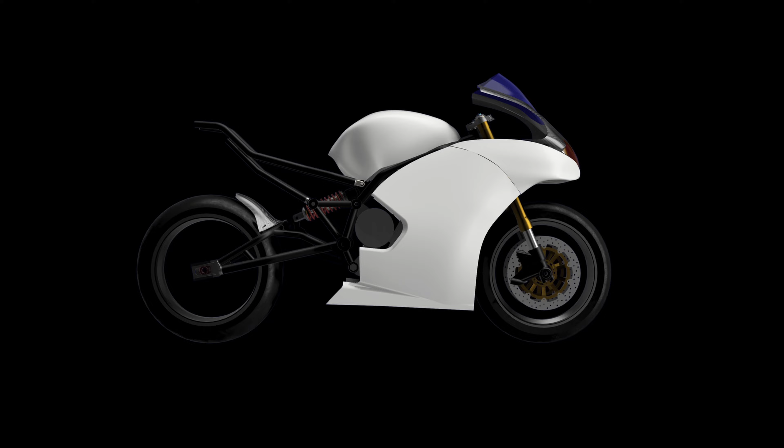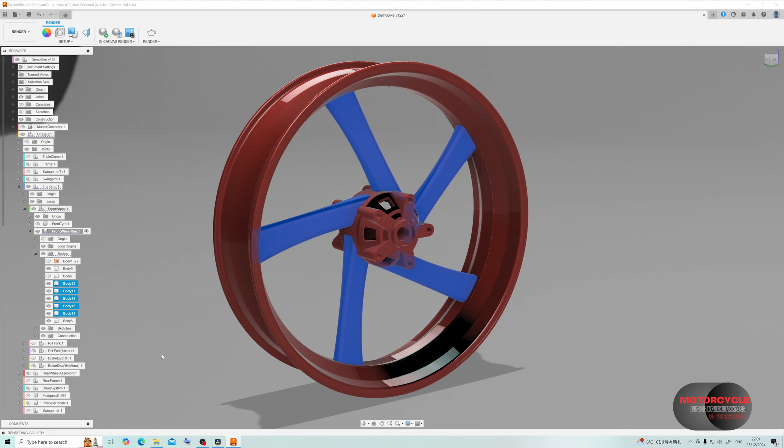In this video we're going to model a front wheel, and we're going to simplify it by breaking it into a number of components, starting with the rim, and then we have the hub, and then from there we will build the spokes. Now, the manufacturing method would usually dictate how we want to build a model. In this case I'm going to treat it as if it's a high pressure die cast wheel.

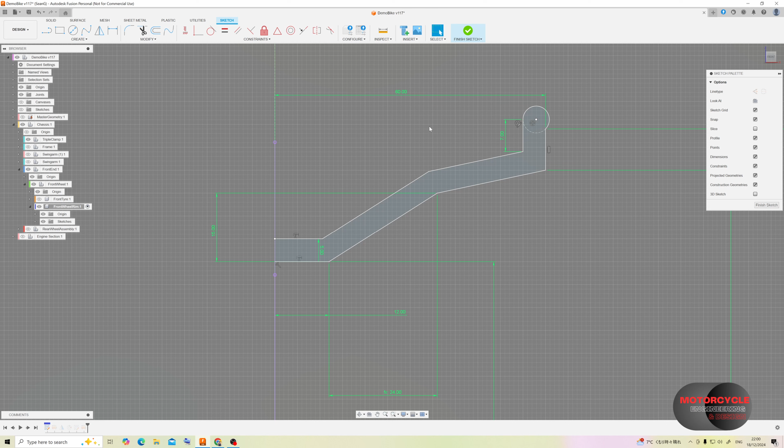So to start we're going to need to sketch the profile for the rim. We only need to sketch half because we can mirror it later on. Now, depending on the style of bike and the type of wheel, this profile could be quite different. In this example we'll just be using the kind of wheel from a 600cc sports bike. So once we have this open sketch profile, we can then revolve it as a surface around the spindle axis.

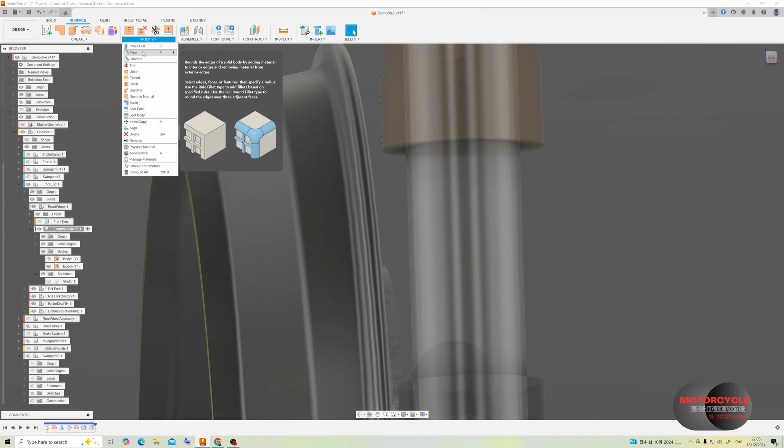So as you can see, we now have a hollow half rim. Now before we mirror this to complete the rim, this would be an ideal time to start applying our rounds so that we can reduce the amount of work we need to do later on. Now in mouldings and castings it's typically ideal to maintain a consistent material thickness where possible, so I try to keep my internal and external rounds concentric.

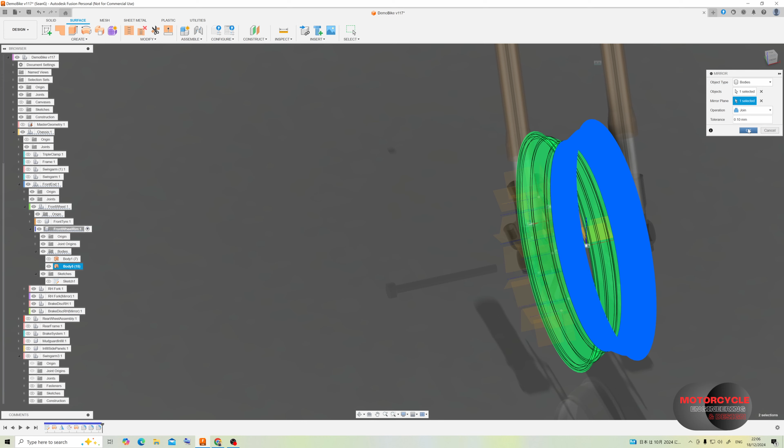In high pressure die casting however, we could probably get away with a little bit of extra material thickness here and there, within reason, due to the high pressure nature of this process. One of the main problems is the difference in temperature throughout the material. We know as materials get hot they expand, and as they get colder they contract. So if they're heating or cooling at different rates, we can get warpage and even pockets within the material. This can then lead to cracks. That would be porosity. Other problems would be shrinkage and warping, to name a few.

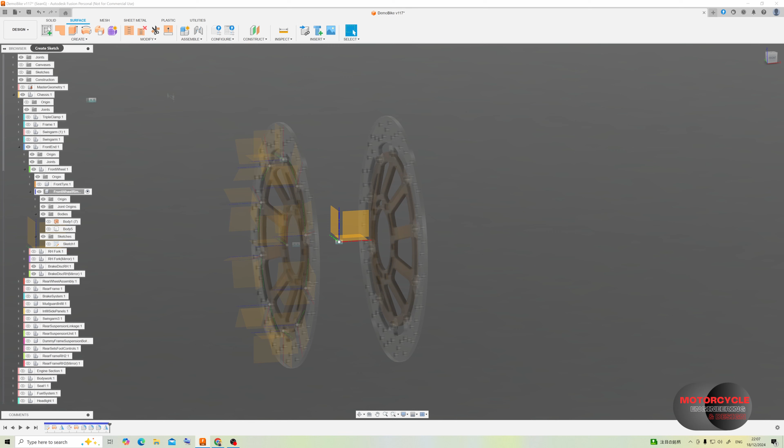Now in the previous video I modeled up some brake discs in position, so I'm going to use that position as a reference when I create the mounting points on the hub. Now, as with the rim, we just need a profile that we're going to revolve around the spindle axis. And we only need to draw half of it and then we can mirror the other half across.

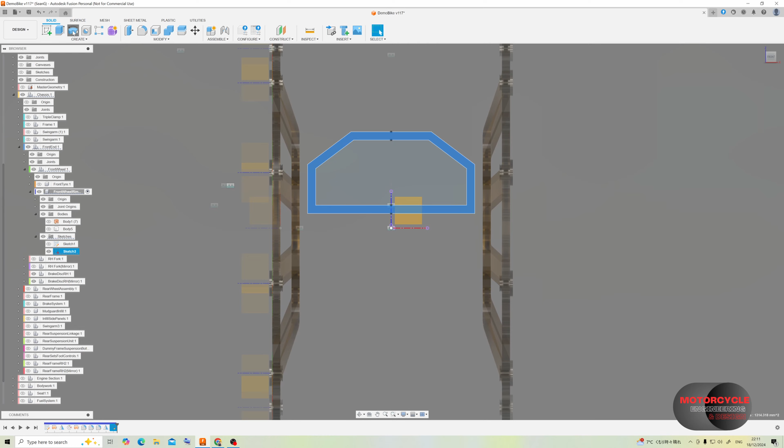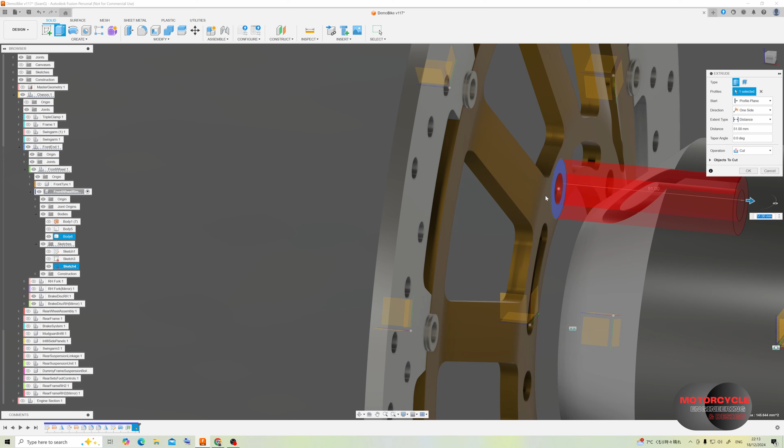Now we're going to start considering the mounting bosses for the brake discs. So I'm creating a plane offset from the mid-plane, roughly at the point where I want the brake disc to be mounted. I'm then going to extrude the bosses to the mid-plane. You could of course do this in the opposite direction, extruding from the mid-plane out to the offset plane. Of course I'm going to have 5 mounting points, so I need to use a circular pattern to copy this around the hub. We can then mirror them to the other side.

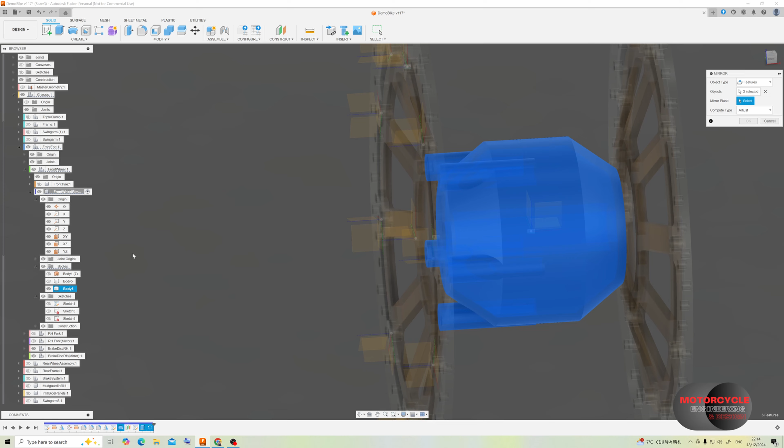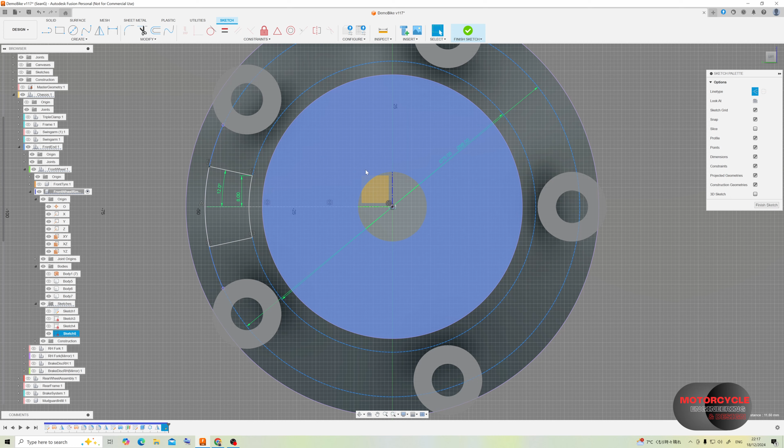So like most hubs, this is actually hollow, so I'm just going to cut some windows so we can see through it. I'm going to do this with 2 different sketches. The first one I'm going to lay out the profile that I want to be projected onto the surface. Then we need to come out of that sketch, creating a new sketch. And that's where we create a projection onto the surface. We have to select the vector direction, which will be the axis.

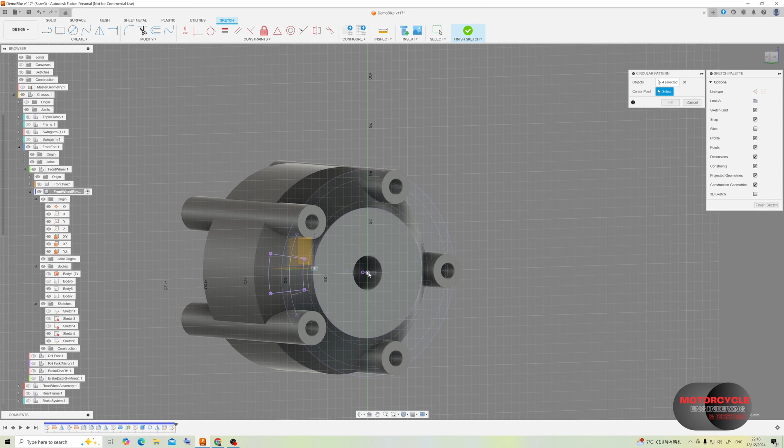So here I'm using the circular pattern to copy the sketch profile around the hub. Now this method is actually a little bit inefficient. It means repeating the same actions 4 times. Ideally we would break it down into sections, so we'd only model like a fifth of the hub, and then we could circular pattern that to complete one side and then mirror it for the complete hub.

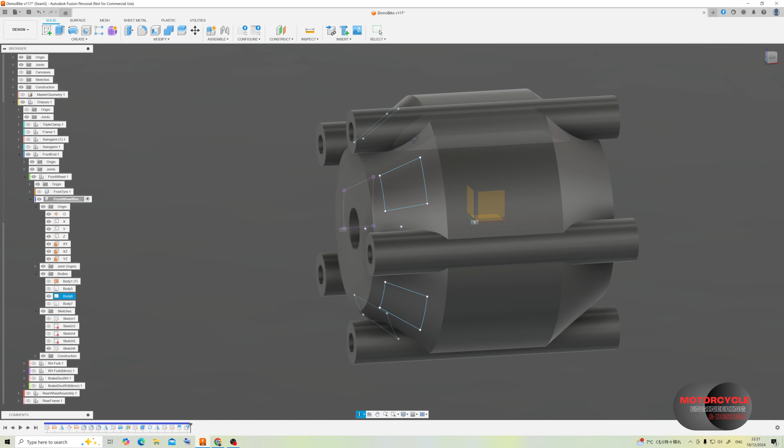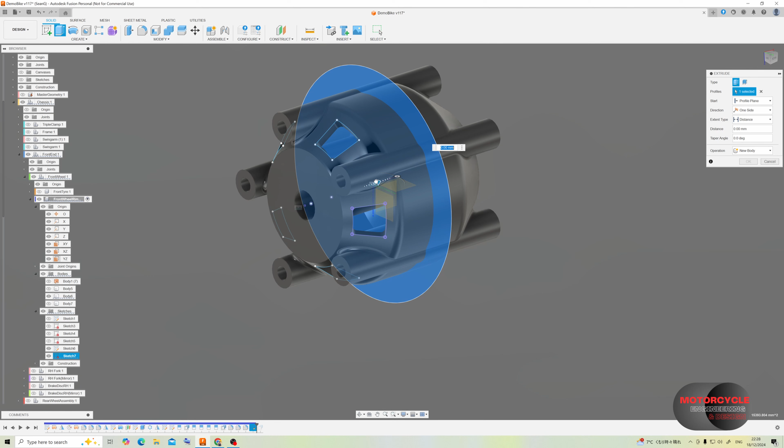So what I've done here is I've used the sketch profile to split the surface. I've then used push and pull to remove the material. And I do it in this way so that the material is removed normal to the surface. And as you can see, we then repeat that for the other side. Then it's just a case of tidying up the model by applying some rounds. So by this point I decide to shorten the process, and I do that by extrude cutting half of the hub away. And then we can mirror the remaining half for a complete hub.

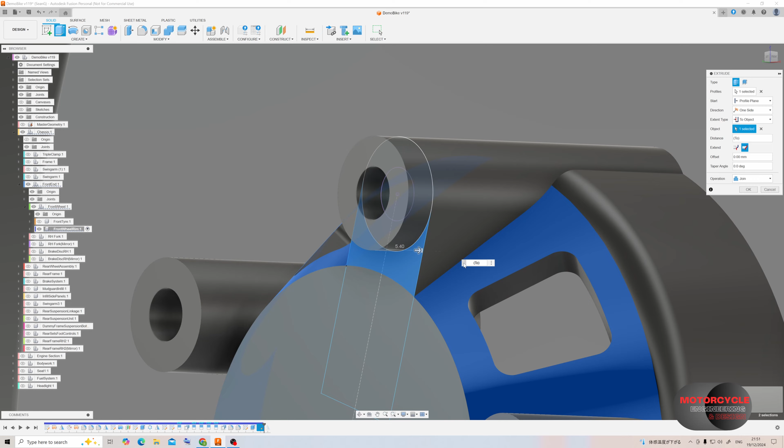I realized at this point that the mount points for the disc carrier should actually extend beyond the brake disc. So I'm just going to build some extra material around these towers, extrude it up, and then we'll cut that material away for the brake discs to seat.

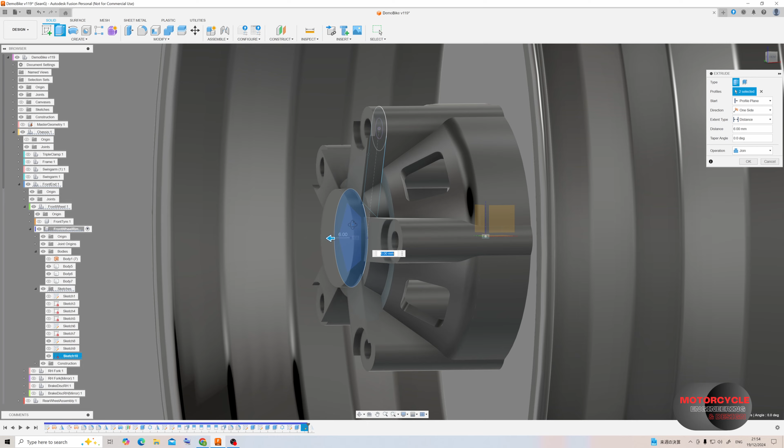And then within that I also want to build the material for the bearings to seat. I'll start with layering these surfaces and I'll build them up with a taper. So this is the external material where the bearing will be seating. With that though, we're going to be extruding a large hole, a large cut through the hub. So I need to thicken up this internal material a little bit.

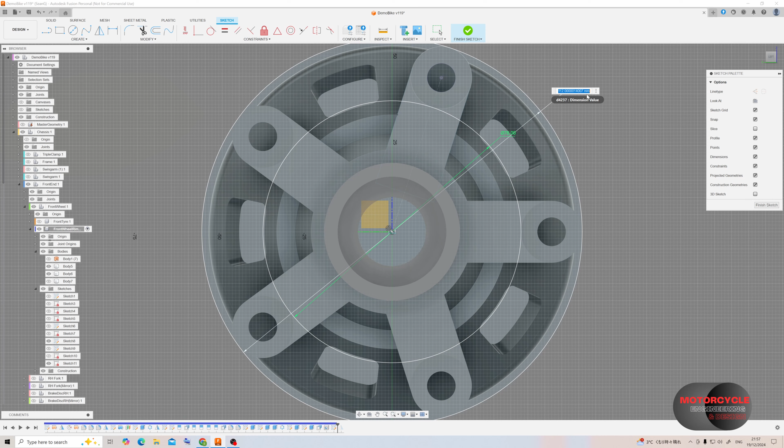And then I use the hole tool to create a hole through the center of this boss, selecting the counterbore profile for the bearing to seat. Now it's the final cut for the brake disc carrier mounting surface. So for a production part, this will be modeled initially as a whole part out of the casting. Only then do we start adding the machine processing, such as the cuts. This results in multiple levels of production drawings.

So there's numerous different ways of modeling the spokes. I'm going to share a couple of methods now. The first one is going to be using the Loft tool. So let's say you want the spoke to come out of the hub at an angle and then have this small bend as well. So first start with sketching this line, which would usually be the path when we use something like the sweep function.

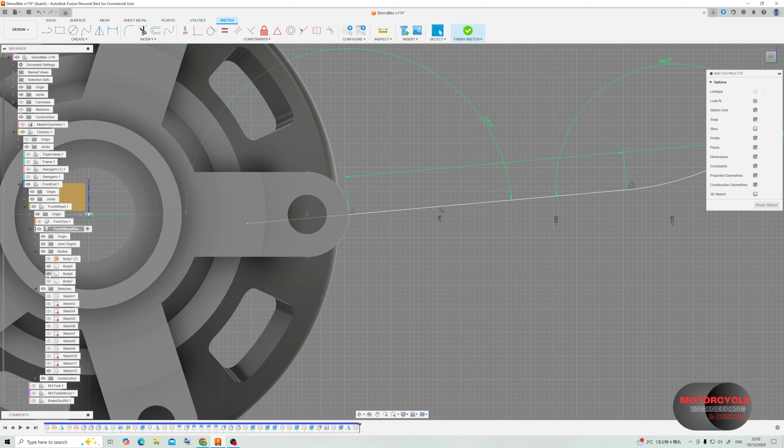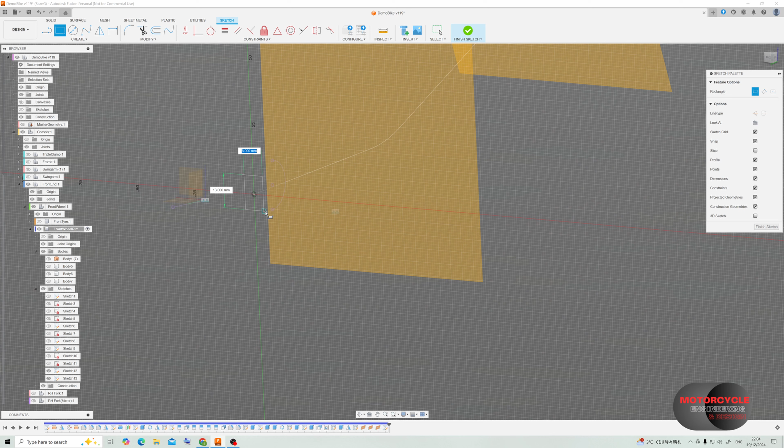But what I'm going to do here is I'm going to place a plane along the path. I'm going to place one at each end and then one or maybe two in the middle. Now we have these planes. These are going to act as our sketch planes to control the profile of the spoke. So on the first plane I draw the profile. We can then draw the similar shape of different scale, different sizes on the following two planes.

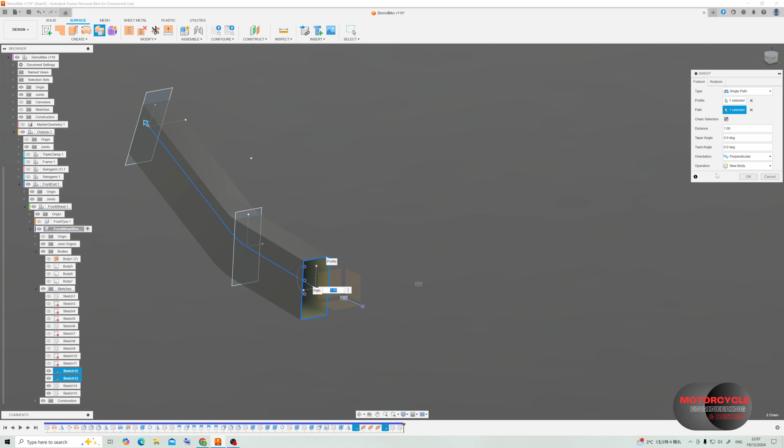Now if we use the sweep function, we're going to be quite limited with the geometry we're going to be able to create. So by selecting the profile and the path, we get something that looks like this. So what if we don't use sweep? What if we use loft instead? For this we select all of our profiles in order, and a surface is swept between each profile. The curvature is interpreted from the profile and the position of those profiles that we've created.

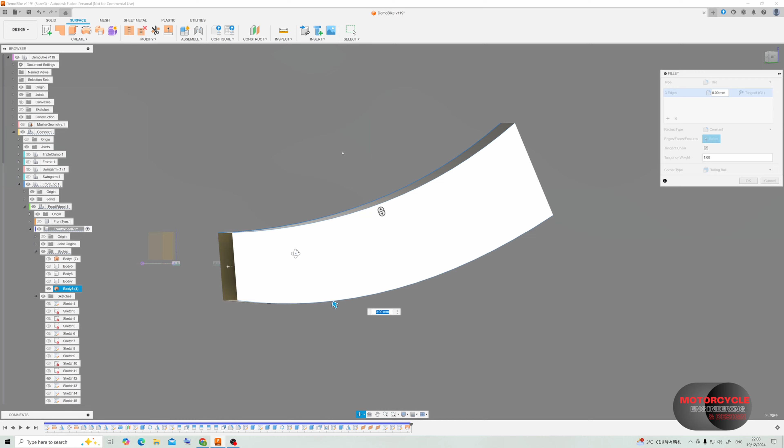Once we have this, we can then add in our rounds or draft the surfaces to make it a little bit more interesting. And as always, when working with surfaces, we want to overbuild because we want to build it into the rest of the geometry nicely. Now I'm going to change this path for my current design. I'm going to make this a straight line but at an angle relative to the hub.

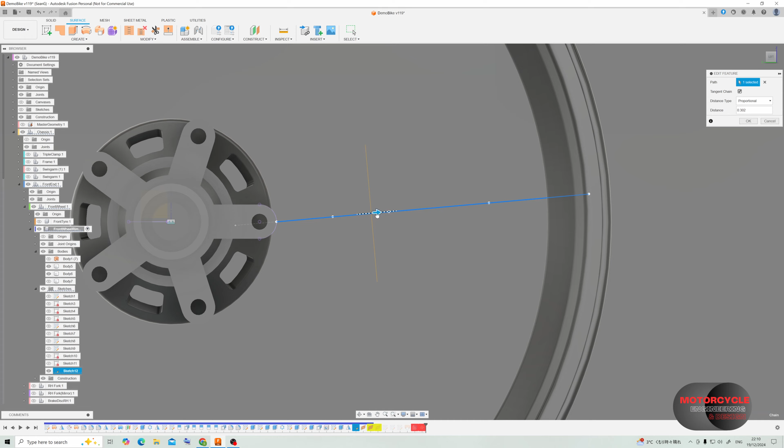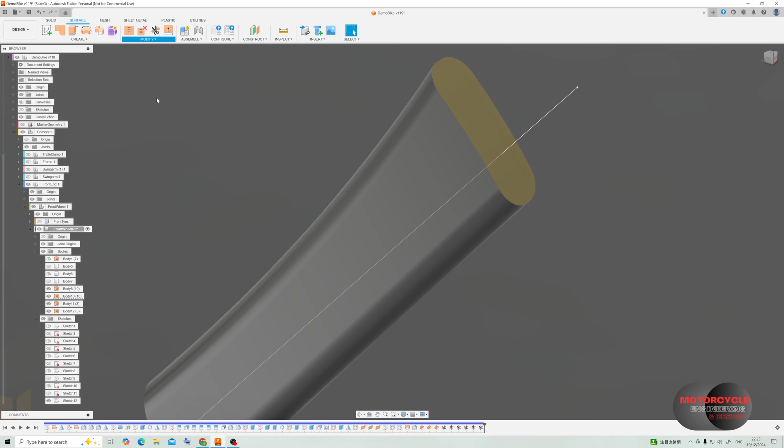So in order to merge this together nicely, we have an offset surface creating the inside of this spoke. We've created an offset of the rim and an offset of the hub. We can use all of these surfaces now to trim these down, stitch them together, creating one body. So now all of the surfaces that made up the spoke have become a single body. We can then combine that with the existing bodies for the rim and the hub.

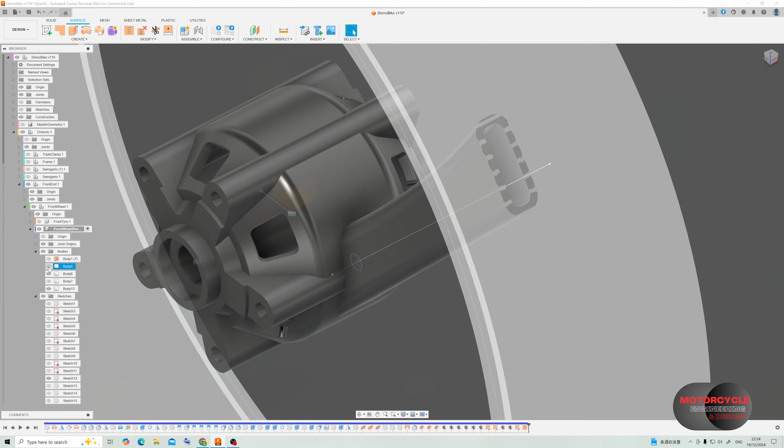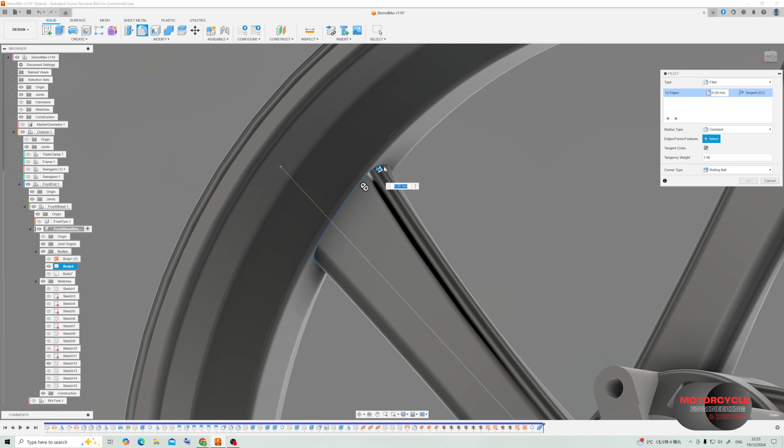But before we do that, we should use the circular pattern on the spokes. Then with our circular pattern complete, we want to merge this all together, and then we can start adding in our final details, the rounds. And here is the finished model. For this project, this is just a placeholder for now. In the future, I'll work on the design. But of course, the model is never finished until you've rendered it.